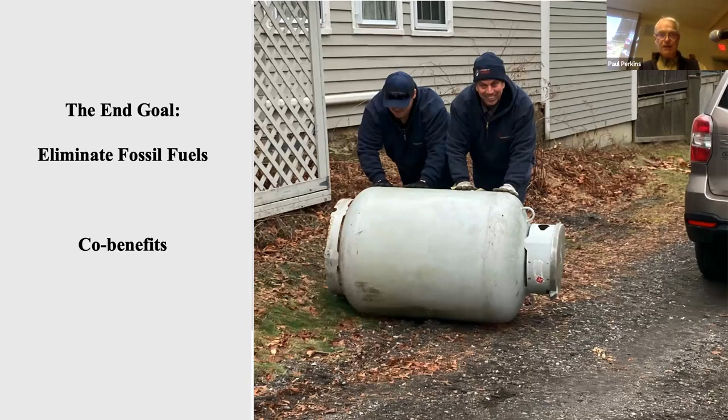Oh, it came through. Well, this didn't happen earlier. I was going to skip this slide. I think it will anyway, because it takes... I'm just going to explain it. Whoops.

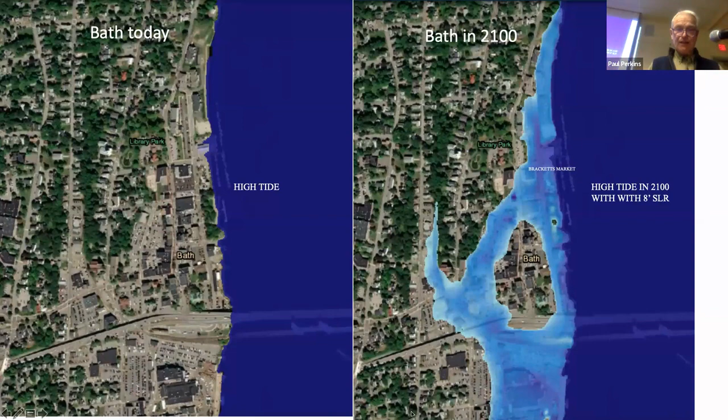So I'm only showing these to kind of underscore the urgency that we're all living with. But getting back to the main focus of the talk, I'm going to talk about retrofitting our house, which is one thing you can do to make a difference.

I really like this slide. It came from Richard Burbank, who can't be here tonight, but I'm hoping he's on Zoom - he said he was going to try to make it, but he can't be here because he was exposed to COVID. He was the one from Evergreen Home Performance. He started the company maybe 15 or 20 years ago, and he came in and evaluated our house back in 2007. He gave a talk about a year ago, and I borrowed this slide from his talk.

He is here on Zoom. Excellent. If you have any questions - great.

So it's nice to think about the green options at the top. When I think about green options in renovating a house, I think about solar panels and electric vehicles and heat pumps and so on. But it's also advisable - most home energy experts say you want to make sure the house is safe, healthy, comfortable, and durable. Safe means the foundation isn't crumbling away, the floor structure and structure is sound, there isn't radon leaking through the floor, and that it's comfortable.

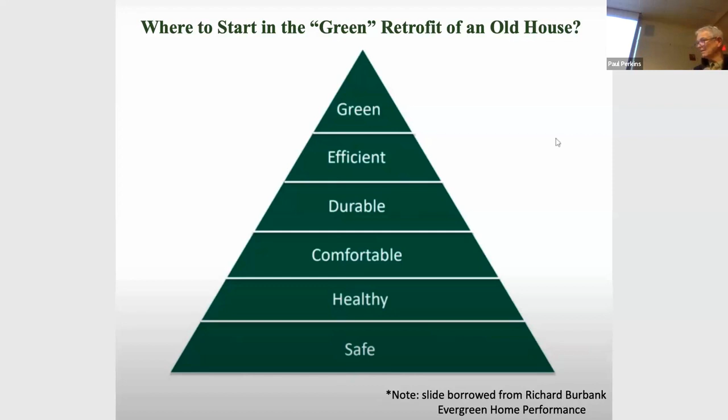And as Richard says, composting is great if it's your food waste, but not so great if it's your basement. So you really want to make sure it's durable, which means paying attention to air and moisture movement. That being said, most of these issues - safety, health, comfort, and durability - are addressed, hopefully, by a good home performance expert who will come in and help advise you about any concerns that need to be addressed. So mostly I'm going to be talking about efficiency and green options.

But before I do, who do you call? Who can you turn to for guidance? I think the best place is this outfit called Efficiency Maine. They have all sorts of resources, a wonderful website that tells you about rebates and federal tax credits. You can call them and they'll help guide you to places on their website.

You can also find a registered vendor there, which is really good. On this page of the website, you fill in your zip code and how far you want the person to travel. They sort these vendors by the number of rebates, which is a proxy for how popular or experienced they are. So the first three or four people that pop up might be the ones you want to call.

So we started in 2007. We had a free one-hour consult, followed by a full home performance audit. This is just a schematic, obviously, but they looked at all the places air might be leaking through to the attic or into the basement through the rock wall we had.

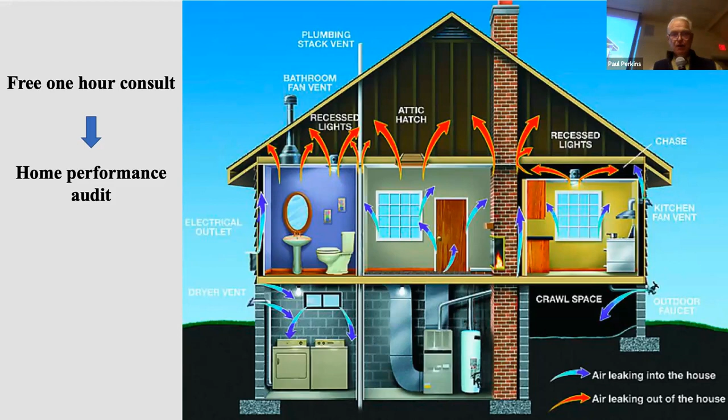So what did we do? This is the first thing they did — they came in and put heavy duty plastic up along the rock wall. This was all dirt floor at the time; it went down across the dirt floor, up the other side, and was all sealed off, taped and everything, so it was able to stop moisture movement and also air.

Then they sprayed foam on top of it, so our nice, beautiful rock wall turned into this — not quite as aesthetically appealing, but we don't spend a lot of time down in the basement looking at the wall anyway, and it's a whole lot more comfortable. We really did notice the change in comfort when we did that, wouldn't you say, Nance?

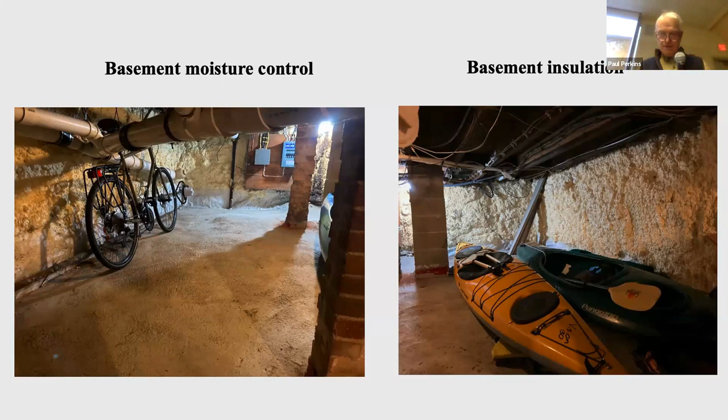Six years later, when we'd had enough resources, we had Evergreen Home Performance come back — this was 2013, maybe — and we blew in cellulose into the attic. They both blew in like several feet of cellulose.

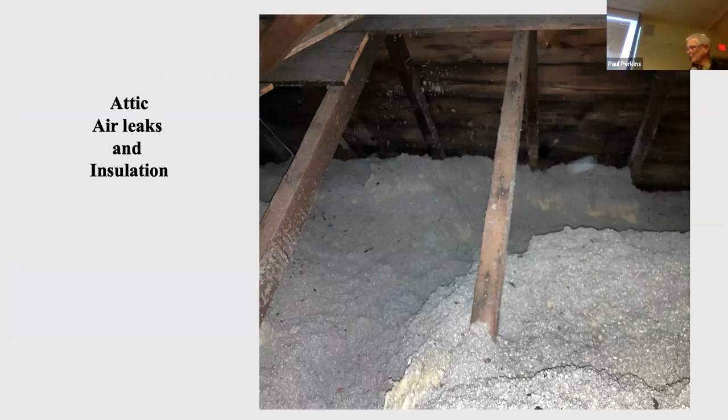I don't know if they did this — this isn't from our house — but hopefully, and I'm sure Richard did this, they sealed off around all the penetrations into the attic, like electrical boxes, plumbing vents, or the chimney, to make sure you weren't getting air leaking up into the attic.

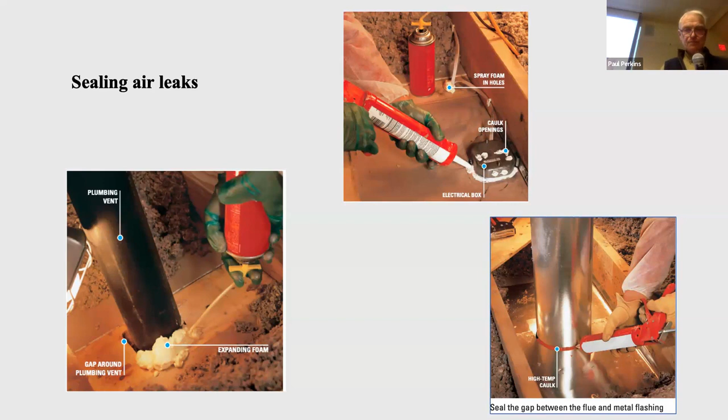Somewhere along the line we replaced the windows — I think we actually did it twice. The first time we didn't have a lot of resources, so we bought some fairly cheap windows which weren't really double pane, just single pane with a so-called energy panel. Eventually we replaced them gradually with double-glazed, higher quality windows.

We haven't done a lot of this, but there's another option that's way cheaper. It's not as convenient for sure, but it does the same sort of insulating job — replacing windows with what they call window insulating inserts, which you can build yourself.

We've also had, in Bath the last couple of falls, a program called the Window Dressers Program, where people put in requests for window inserts to be built for their house. It's actually pretty community building, and people enjoy getting to know each other. Nobody has any skills doing this when they come, and they assemble these window frames. That's one in our house we put in the mudroom, and I put a few in our barn.

What about that? So this is just a little sample, but it's got 2 layers of plastic on both sides, and it's got this foam, so it sort of friction fits into the frame. It's really effective. Of course, you want to be able to open your windows, so you have to take them out and store them in the summertime. One question I've had is, of course, it's plastic, so what's happening in terms of recycling? That's not the most optimal thing to have plastic windows, I guess, but they're quite insulating.

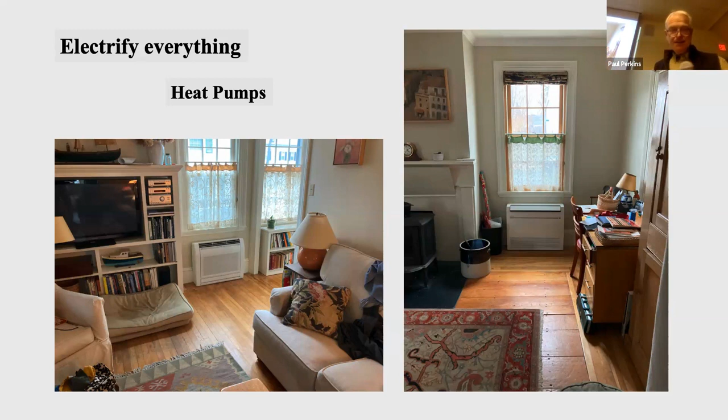And this is bringing me to the next slide, which is our wood stoves. So we do have 2 wood stoves, and we love them, and they provide a lot of ambiance, and you can stand by it and get warm. So it's a hard thing to imagine giving up. However, wood does release carbon dioxide when it burns, so we are contributing to the climate problem.

Ideally, the wood that you're burning is also being sustainably replaced, so that the carbon that you emit when you burn it is being reabsorbed by other trees or new growth. I don't know how you quantify that or verify that, but that's ideally what would happen.

Unfortunately, wood stoves also have other characteristics that maybe are not so desirable, which is that they do emit other pollutants, including black carbon. And I've been reading about that, and I guess black carbon is a pretty potent global warming gas. It's basically soot, that's my understanding. So if it gets up into the atmosphere, it can trap heat just like the other greenhouse gases.

Have you guys experienced the power going out in your house? Yep, I assume you might have. Yes. And then when that happens, if you were being heated solely by heat pumps, are your 2 wood stoves carrying you over, or are you using a generator or whatever? No, the stoves are great.

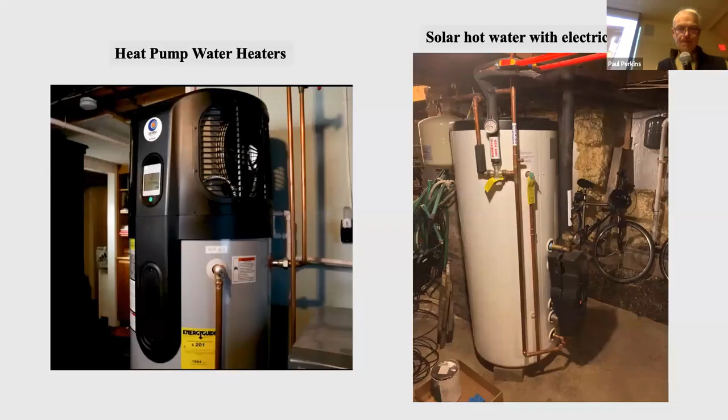Heat pump water heaters—this is what Efficiency Maine is all about these days. This is apparently their number one recommendation, a heat pump hot water heater. It sort of baffles me. This is sitting in a cold space in your basement and apparently efficiently brings enough heat from that space to bring your water up to 120 degrees and be economical.

What we have is a solar hot water system that we installed in 2007, which at the time was the way to go. So we have solar panels up on our roof, and the system works great. Revision Energy put this in. And in the summer months, I think we can say we pretty much get free hot water off of this for about 4 months. But it's apparently not the way to go anymore.

Efficiency Maine is recommending these heat pump water heaters, and they have incredible rebates for them. You can almost get them for free if you're low income now. And even if you're moderate income, you get quite a bit of discount.

I can chime in on that. The solar hot water used to be the way to go, as Paul said. But those systems are still a bunch of plumbing components and mechanical systems, which have only increased in cost, whereas solar electric panels have come down in cost. So you're more effective now using your roof space for solar electric collectors and then running a heat pump water heater than using that space for solar hot water.

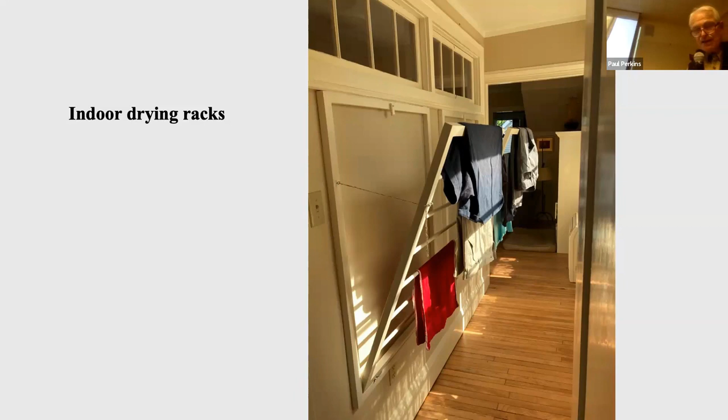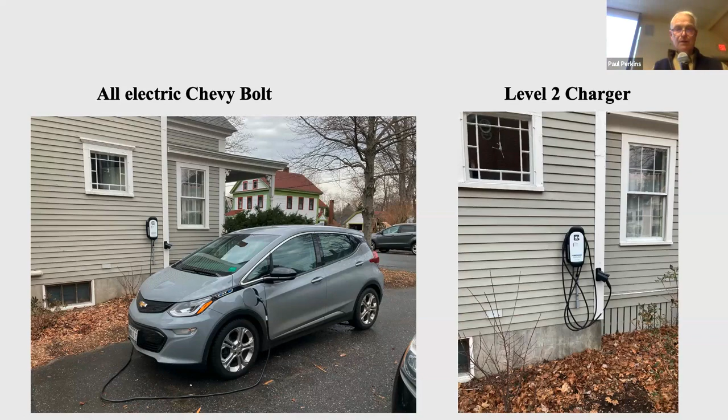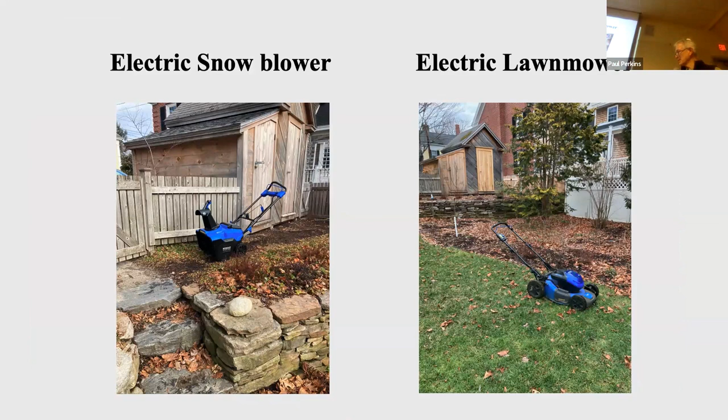Electric snowblower and electric lawnmower, they both work great. Just got this snowblower last winter, I've used it about three times and it's really fun, and it's powerful enough—I was amazed, I thought it wasn't going to be powerful enough, but it seems to be so far. This lawnmower I've been using for a few years. When you look at how much emissions come from 2-stroke engines, they say they can spew 20 to nearly 300 times the emissions of a car. So gas-powered lawn tools are really not good for climate change. If you're considering a snowblower, a lawnmower, or if you must, a leaf blower, think about doing an electric one.

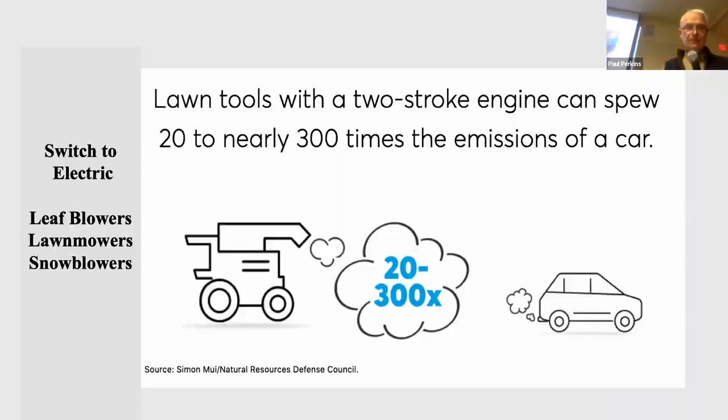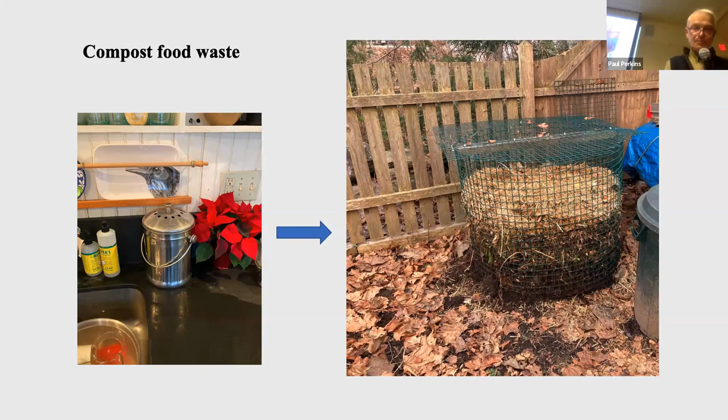Thank you for coming. Oh, okay.

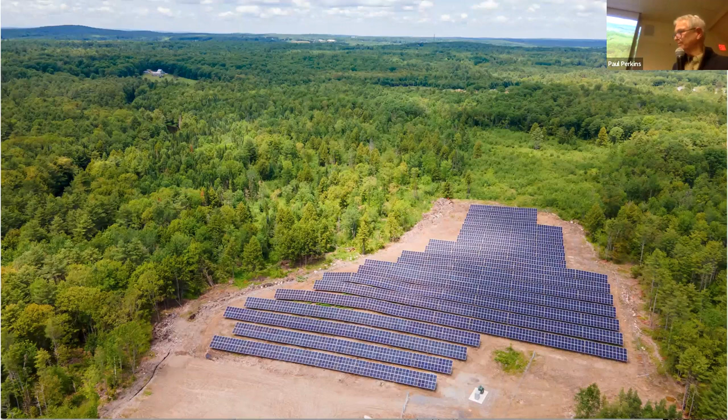I look at this site and think, oh boy, they cleared all this woods to put these solar panels up. Is that a good thing from a climate standpoint? I think that's a controversial point—I don't really know the right answer, but you're taking away forest that was sequestering carbon and replacing it with solar panels to generate renewable energy. In this case, apparently the homeowner was going to cut this anyway, and it was not old growth, so I don't quite know where the trade-off is there.

The end result, at least projected, is that if we had gone business as usual, according to Revision Energy's projections, we would have spent around $97,000 on electricity over the next 25 years. The solar project, after the initial expense plus all the maintenance over 25 years, comes out to about $43,000, and the electric delivery charge to about $6,500. The difference is about $47,000 saved over 25 years, which is pretty significant. Does that sound right, Thomas?

Yeah, you can think of it as pre-buying your electricity for the next 25 years.

And on the carbon piece, each of those solar panels is a much more efficient converter of sunlight into energy than leaves on a tree are. So from a carbon perspective, that is offsetting significantly more, especially when you compare it to burning fossil fuels for the energy to power your home and lifestyle instead. So we obviously don't want to remove trees if we don't have to, but it is still clearly, each of those solar panels is offsetting dozens to potentially hundreds of trees worth of carbon. Interesting. Okay, yeah.

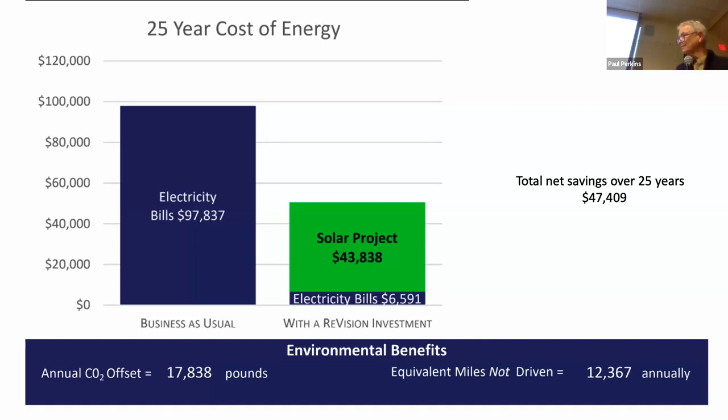I'm not going to talk much about this, but there are different community solar options. John and one of our other climate committee members is going to talk about this in more depth in March, but there are different options. We went for the shared ownership community option, but there's one where you don't have to invest anything and you still get 10 to 15% savings. I don't know why everybody's not doing that because it makes sense.

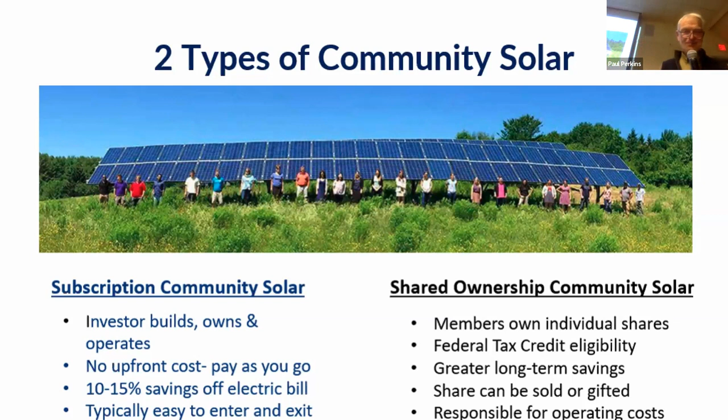So I think the lesson for me here is there are lots of creative things we can do, and don't think you're too small to make a difference. I think we sometimes think that we have to wait around for these grand policies to come down from Washington or somewhere to really solve the problem - this is too much, I'm just one person - but I think one person can make a big difference. And this is one institution that I think's obviously inspired a lot of people. So similarly, I suggest that we all try to find ways that we can set examples. And thank you for listening.